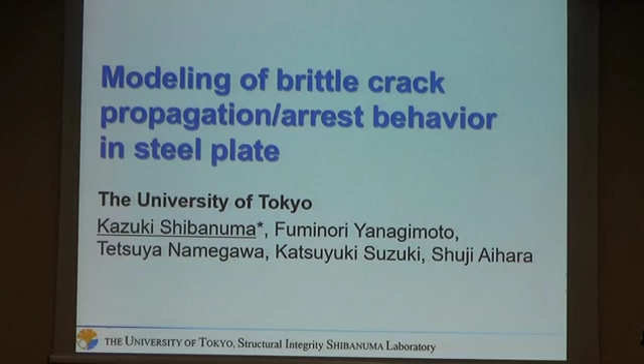First, I'll explain the introduction of this study. Recently, the thickness of the steel plate used for ship structures shows a rapid increase due to the enlargement of the size of ships. It is known that increasing thickness of the plate makes the risk of brittle fracture initiation higher. So, arrest design for double integrity is important to ensure the safety of the ship structure.

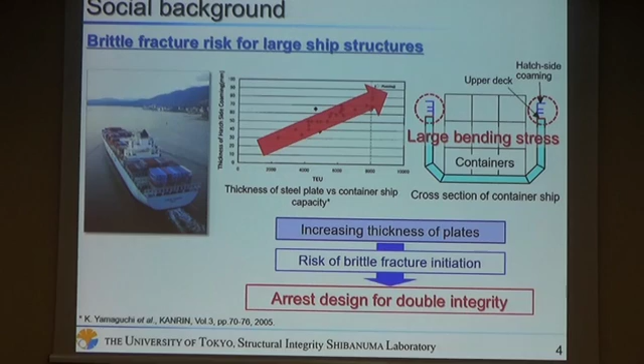The arrestability of the steel plate is evaluated by a crack arrest test based on linear fracture mechanics theory. There are two types of arrest tests: temperature gradient type and duplex type. The temperature gradient crack arrest test is used for evaluation of arrest toughness KCA as a function of temperature. On the other hand, the duplex crack arrest test is used for clarification of the required KCA under constant temperature for design of actual structures.

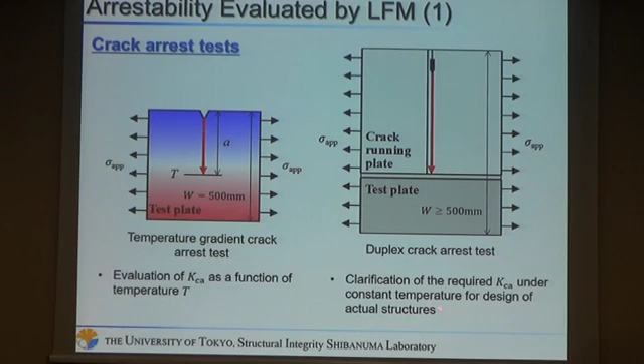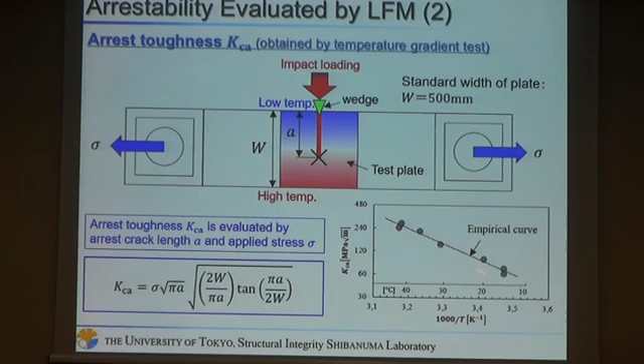This slide shows a procedure to evaluate the crack arrest toughness KCA obtained by temperature gradient test. In this test, a crack is initiated at the low temperature site by impact loading, and then the crack propagates and is arrested at the high temperature site. Arrest toughness KCA is evaluated by arrest crack length and applied stress as shown in this equation. It is empirically known that the logarithm of KCA and the inverse of temperature shows a linear relationship, as shown in this figure.

However, in the wide size duplex test, it has been reported that the crack was arrested even if the stress intensity factor is larger than the arrest toughness KCA. This theoretical background has not been clarified for more than 40 years. That is the long crack problem.

Recently, however, the IACS published an actual design requirement of KCA as shown in this expression. However, this design requirement is only based on experimental results, so it is important to clarify the theoretical background of this long crack problem, to ensure the safety of ship structures. That is the objective of this study.

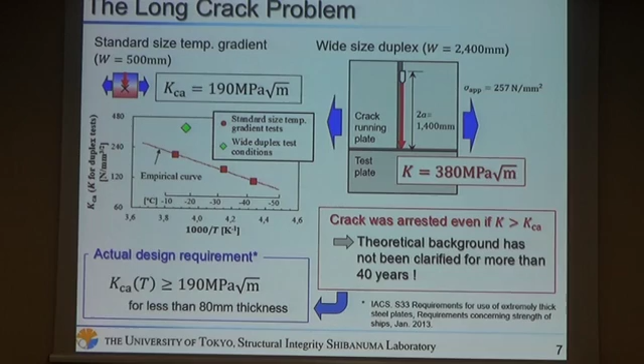Next, I'll explain the modeling of brittle crack propagation arrest behavior. This slide shows the concept of the proposed model. The brittle crack propagation and arrest behavior in steel plate is a very complicated phenomenon, so I tried a simple modeling approach. This model is based on the fracture stress criterion, and we employed three assumptions for simplification.

First, the shape of the crack front is straight. Second, the side ligaments have a crack closure effect. Third, the evaluation point is only at the mid thickness.

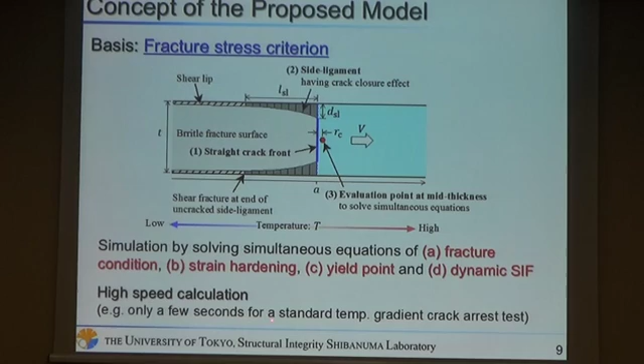The brittle crack propagation and arrest behavior is simulated by solving the simultaneous equations of fracture condition, strain hardening, yield point, and dynamic stress intensity factor. One feature of the model is high-speed calculation. For example, it takes only a few seconds for a standard temperature gradient type crack arrest test.

In the following slides, we will explain the governing equations. First is the fracture condition based on the fracture stress criterion. In this criterion, non-linearity at the crack tip is modeled by fracture stress and a characteristic distance, as shown in these figures.

The concept of fracture stress is a homogenization of microscopic effects such as geometry, spatial distribution, and textures of the microstructure, and so on. The physical meaning of fracture stress is as a substitute for the effective surface energy by linear fracture mechanics theory. Actually, we use this equation for the fracture condition.

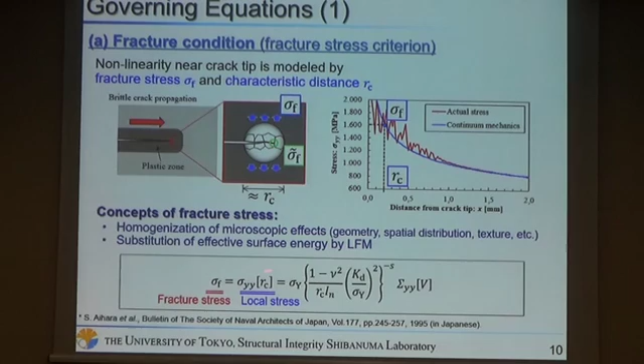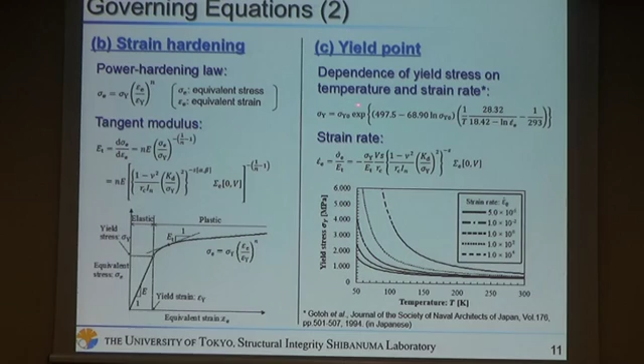The final equation is the dynamic stress intensity factor. It is noted that in this equation, crack closure effect is considered. That is, the dynamic stress intensity factor is evaluated as a product of the correction factors of effect of crack velocity and static stress intensity factor.

Static stress intensity factor is calculated by the stress intensity factor by remote tensile stress minus crack closure effect by side ligament. A crack closure effect by side ligament is calculated by integration of the stress intensity factor by a point load at the surface of crack, like this. And the remaining problem is the area of the side ligament.

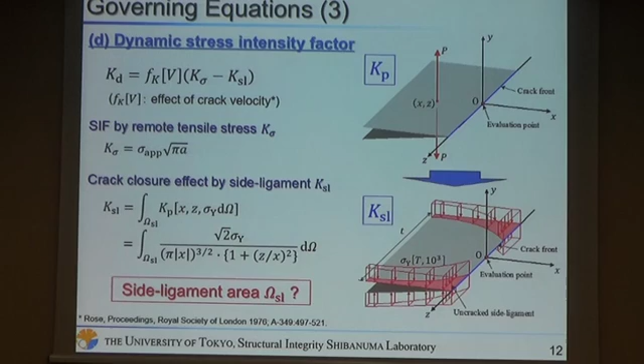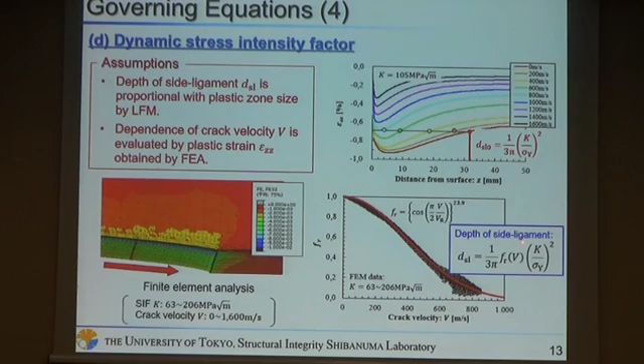In the calculation of the area of the side ligaments, we employ two assumptions. First, the depth of the side ligament is proportional with the plastic zone size by linear fracture mechanics theory. Second, the dependence of crack velocity is evaluated by plastic strain obtained by finite element analysis. Consequently, the depth of the side ligament is formulated as this form.

Brittle crack propagation and arrest behavior can be evaluated by repeated calculation of the simultaneous equation. Crack arrest can be predicted when the equation does not give any solutions. And to simulate the actual crack arrest test, fracture stress is required to identify beforehand.

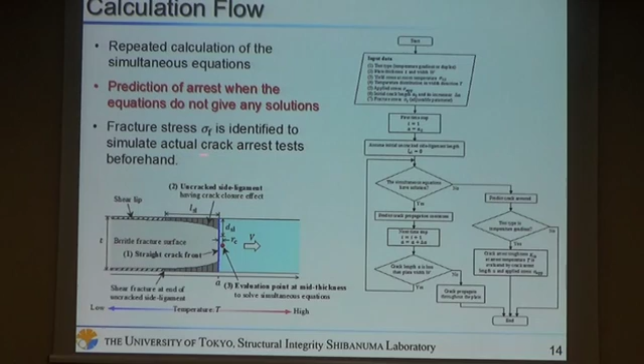I will show you the model validation. The first validation is application to the temperature gradient test. The specimen configuration is shown in this figure. And this table shows the specification of the test plate and test conditions.

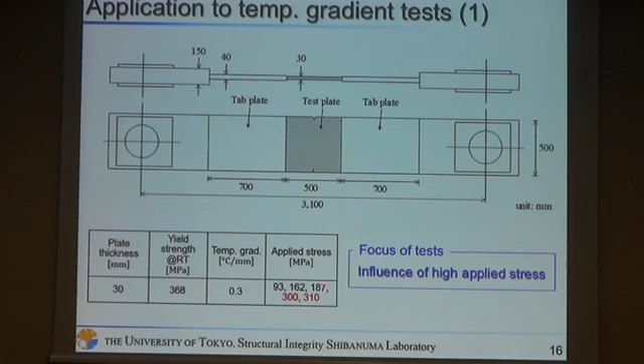The focus of the test is the influence of the high applied stress. This graph shows the relationship between the KCA and temperature at the lowest three levels of the applied stress condition. We can see these results fit the empirical curve. However, the results of the highest level show a deviation from the empirical curve.

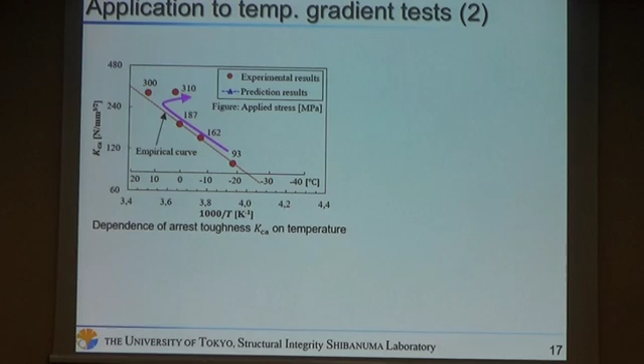In addition, these photos show the fractured surface obtained by experimental results. We can see that the higher applied stress makes a deep side ligament like this. To simulate the test results, we identify the fracture stress like this.

And the prediction results of the relationship between KCA and temperature are shown on this graph. You can see that the deviation of the experimental result from an empirical curve is successfully simulated by the proposed model.

This figure shows the prediction results of the depth of side ligament. We can see predicted depths of side ligaments show good agreement with those of experimental ones.

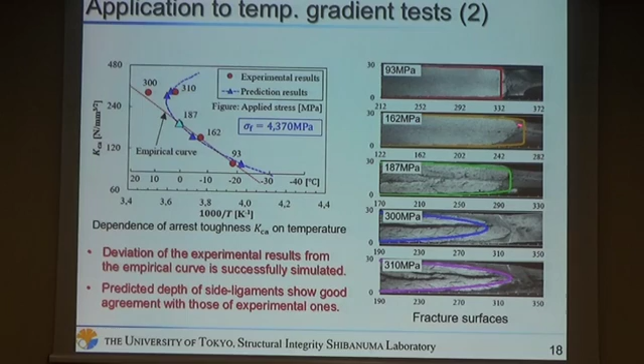A second validation is application to the wide duplex test. This figure shows the configuration of the specimen. And this table shows the specification of the test plate and test condition. Focus of the test is long crack behavior under the condition where stress intensity factor is larger than arrest toughness KCA.

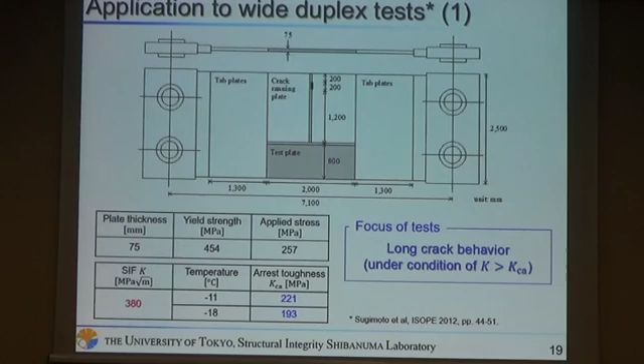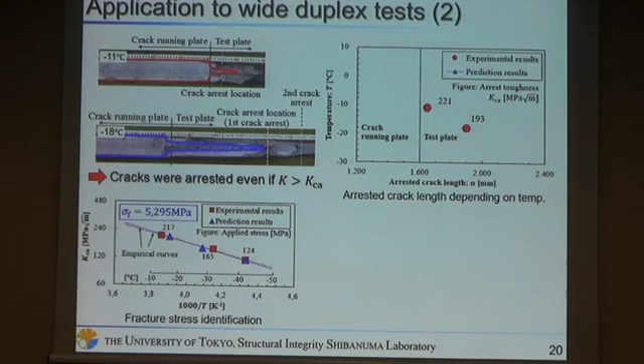To predict these results, fracture stress is identified like this. And the predicted results of the depth of side ligament are shown on these photos. We can see the long crack behaviors are quantitatively explained by the proposed model.

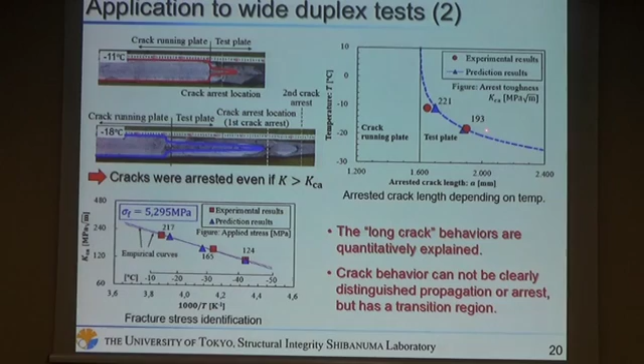And the prediction results of the arrested crack lengths with various temperatures are shown in this graph. From these graphs, the crack behavior cannot be clearly distinguished as propagation or arrest, but has a transition region, as shown in this figure.

Finally, I will conclude this presentation. In this study, we propose a modeling of brittle crack propagation and arrest behavior based on the local fracture criterion concerning crack closure effect by side ligament.

In the model validation by comparison with the crack arrest test, the proposed model can reproduce the deviation of the empirical curve of temperature and arrest toughness Kca relationship under excessively high applied stress condition. And this model shows a possible solution of the long crack problem, where crack is arrested even when stress intensity factor is larger than arrest toughness Kca.

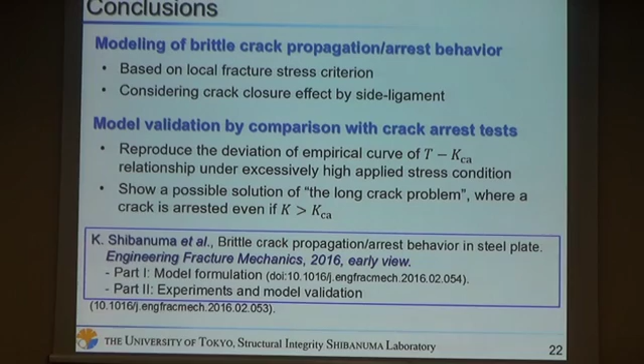The detail of this study can be found in the paper of the Engineering Fracture Mechanics of this year. This is the end of presentation. Thank you very much.